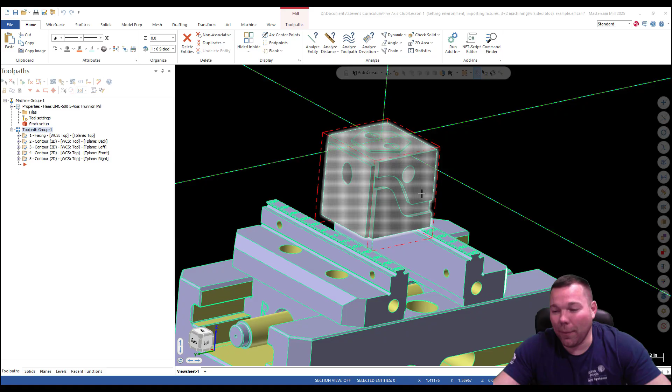Okay, well, we're going to dive right into it. So what we're going to get into here is we're actually going to do some of the machining to this. So we're going to machine around this hex. We're going to machine this profile. We're going to machine this circle. We're going to machine this cross. And we're going to machine this slot. And then we're going to do the drilling. Okay, so we'll do two types of drilling. But anyway, let's get into this.

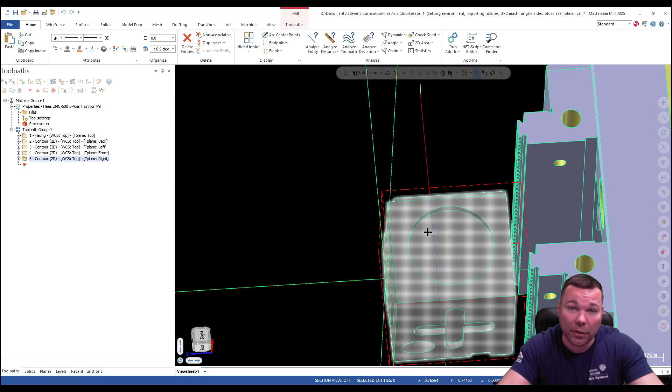So let's start with the top. Actually, check that. Let's start with the last surface we were on. So if we turn this toolpath on, that tells me right now that we were finished on the right side. So since we're oriented that way, we probably want to start there. That would make sense. There's no reason to flip the trunnion back up and start on the top. There's no advantage to that. Now, if there was an advantage to it, then I would do it. But let's go ahead and move forward with that.

So I'm going to turn that toolpath off. And I'm going to make sure I am on the right side plane. I am. So you get my toolpaths. And to do this one, I'm actually just going to do a dynamic mill. So one of the things I want you to recognize in here is the toolpath selection that I'm using. Not only should you be learning about how to do this with the 5-axis machine, but also you should be learning about these toolpaths as well. We'll be doing a lot of cool things with these toolpaths throughout these lessons. This is very basic for right now, but they will get deeper in and more advanced.

So machining regions, we're going to pick that guy. Check. From outside, no, we want to stay inside of that machining region. We don't need anything in here. So go ahead and hit check. Tool. All right, so I'm going to be using a 1/4 inch end mill for most of this. So even though I could probably rough this out with a bigger end mill, I'm just going to use a 1/4 inch so I don't have to do a bunch of tool changes. So I'm just going to go in there and grab my 1/4 inch end mill.

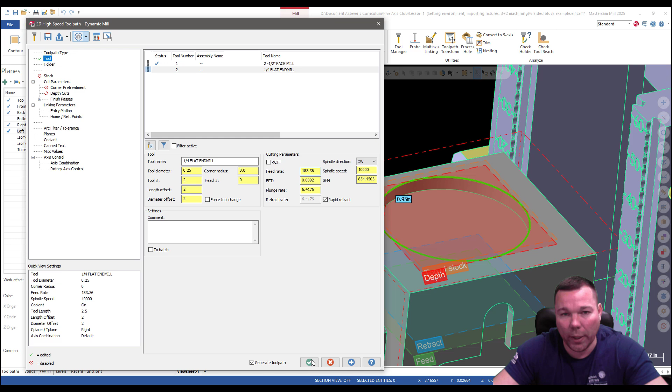And in order to confirm, machine definition parameters, some of its tools have said change values, yada, yada, yada. Okay, so that's fine. It's just telling me here that this particular machine is not set up for 12,000. Its max spindle speed is 10,000. That's all it was letting me know there. I'm actually going to show you how to change that really quick. So I'm going to save this, and I'm going to go into machine, and I'm going to go into machine definition. Check.

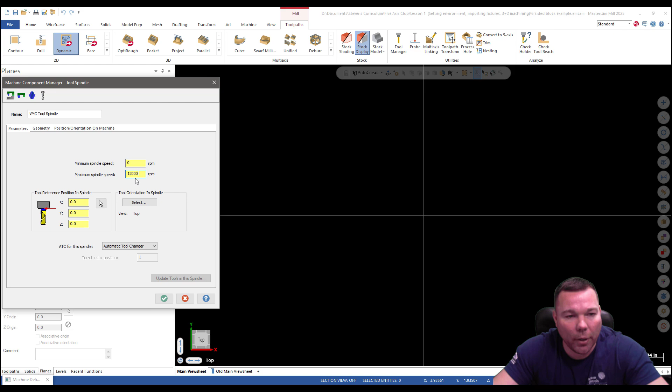And I know the machine that I'm going to be using has a max spindle speed of 12,000. So what I'm going to do is go into the mill spindle group. I'm going to keep opening this up until I get to the VMC spindle, and I'm going to hit properties. And right here I have a max speed of 12,000. That's interesting. So this is actually set to 12,000. So I'm going to hit check. Okay. Next thing I'm going to go is the general machine parameters, and we're going to see what we got in here. See if I have anything in here that might be changing that. No, that's interesting. But generally speaking, this right here is where you change it.

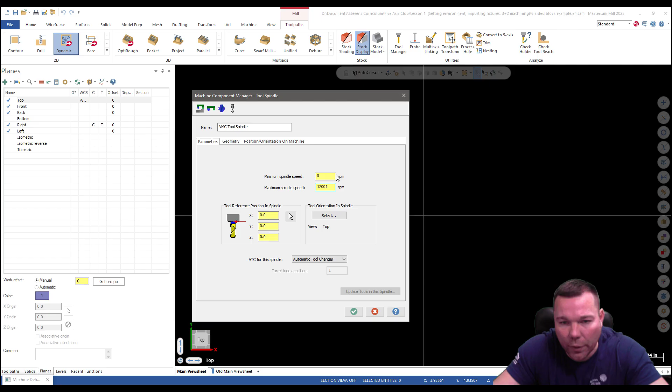Minimum speed 0, 12,000. I'm going to make this 12,001 just to see what happens. And I'm going to go ahead and hit check, save that, and I'm going to exit out of there. Okay, and then I'm going to look at my toolpath, go back in here. I'm going to see if I can save the changes to 12,000 now. All right, now it takes it. Awesome. Okay, so my feed rate 0.001. Okay, radial chip thinning.

Basically, what this does is it takes your surface footage, and I don't want this at 12,000 either because this is steel, I believe. I think I said we were making this out of steel, so I'm kind of messing up here. So I'm going to set this to 400. And I'm going to set this to 1,000th chip per tooth, and I'm going to turn radial chip thinning on. Notice how the feed rate went up. Basically what this does is it takes your step over, which is set at 10% of the tool diameter. I'm going to change that to 20. And watch what happens.

So this here's goofy too. So I have to change this to 650. I'll go in and change that then. But notice now it went down. So it's calculating it based off your step over, your feed per tooth, and your surface footage per minute. I always use this anytime I use dynamic milling. Let me hit check. Oh my goodness, this thing's gonna drive me nuts.

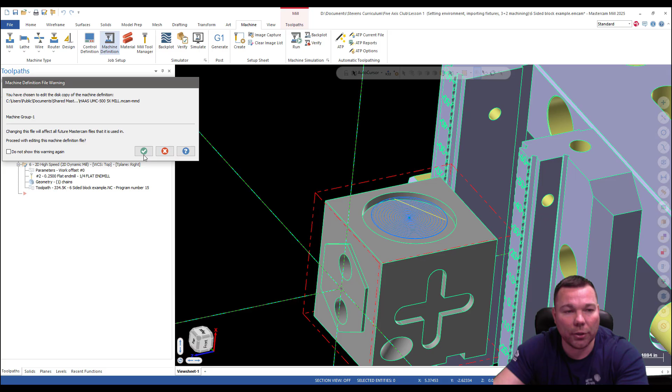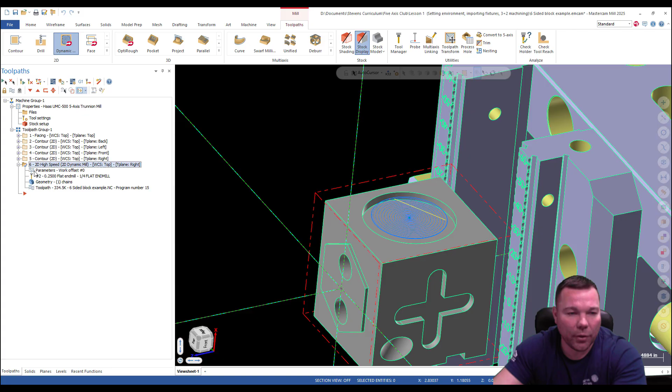And let's go to the machine, and I'm gonna go back into that machine definition. Check. I was just in here. I wish I had changed it. So I know that my axis feed limits are 833. And rotary axis is fine. Check. And I'm going to save that. Check. Yes. So it's just asking if I wanted to replace it with the updated values. Now I'm okay here. Now it's not going to freak out on me. I'm not going to leave any stock on the walls.

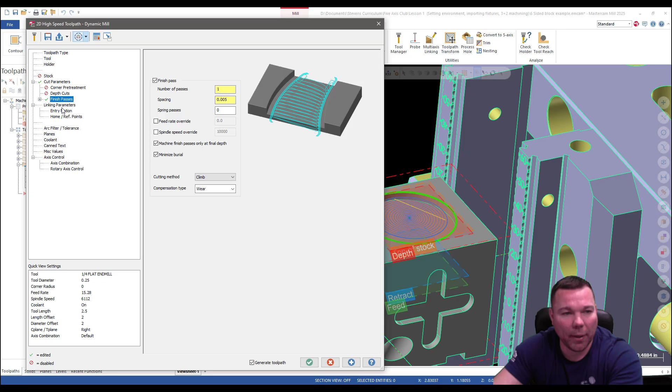Oh, really? Now it's doing it again? Not going to leave any stock on the walls. Finish pass, I'm going to take 1. No spindle override. Machine finish pass at final depth. Minimize burial, that's good. No spring passes, I don't really care about that. Depth, I'm going to select that. Looks good. Entry motion, we are going to helix in here. And everything there looks good. Check.

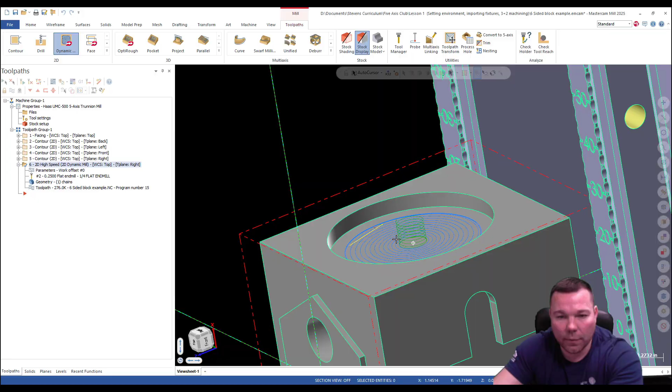Okay. There we go. Now I'm not wild about that retract right there, so we're going to take a look at that. Top of stock's right there. Feed plane. Well, that would be why. So we want 1.1, 1.25. Check. There we go. That's a little better, a little safer. Okay. That looks pretty good.

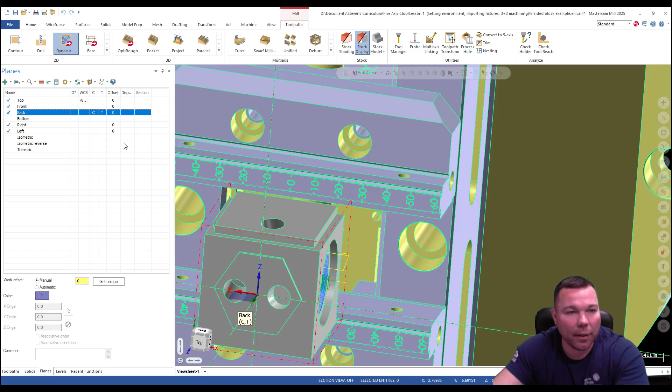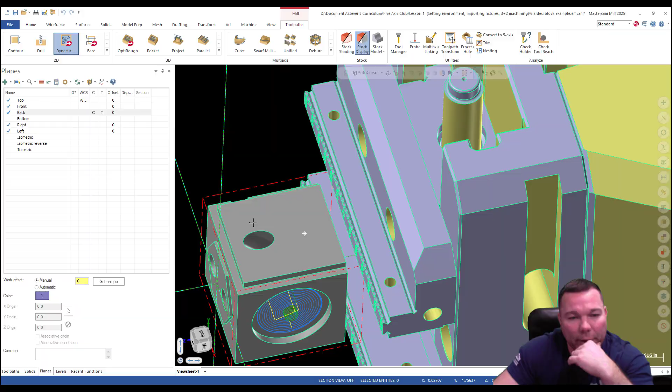Okay. So next thing I'm going to do, I'll go to the side, which is my back side. So go to planes, and we'll swap this to our C and T plane on the back. And for this, I'm actually going to do a contour, basically because I have a vise here. We could technically do this with a dynamic. I think I'm going to show you how to do it dynamic, actually. Contour would be really easy, and then we could just do multipass. But I'm going to show you how to do it with a dynamic.

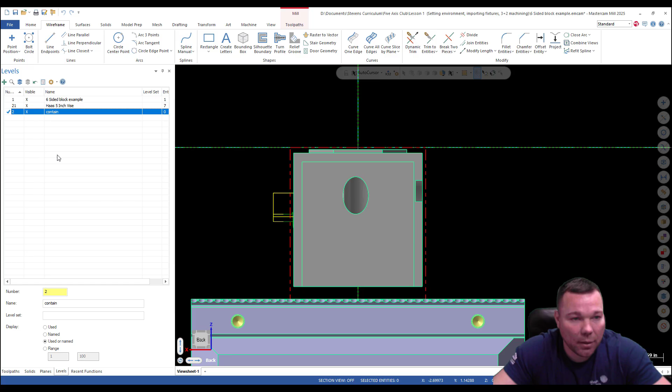So the first thing I'm going to do is I'm going to go to levels, and I'm going to create a containment. And I'm just going to create a rectangle. And I'm going to make sure that it's big enough, but it's not quite touching that vise. Okay, I'm going to hit check. And I'm going to leave that on for now.

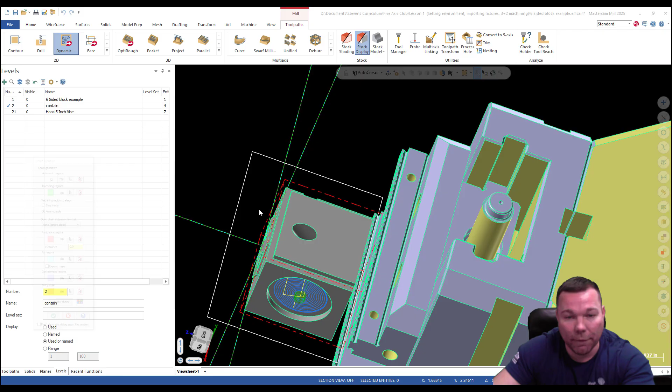And we're going to go into our tool paths, and we're going to pick dynamic mill. My machining region, not going to pick that. I want the stock. I'm going to come from outside on this one because it's an external feature. My avoidance region is going to be that right there. And I'm going to hit check. And then my containment region is going to be this. And I'm also going to have some, well, I can't have air regions because I don't have the edges.

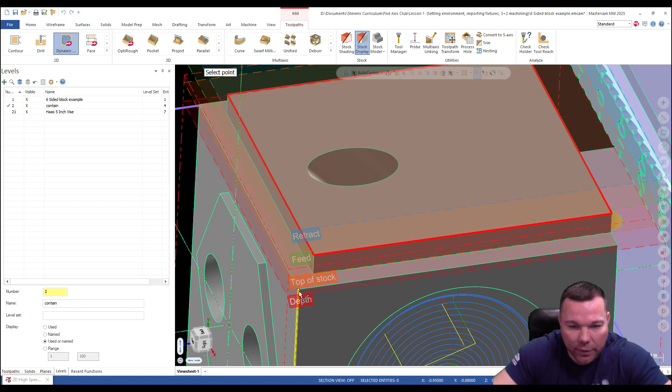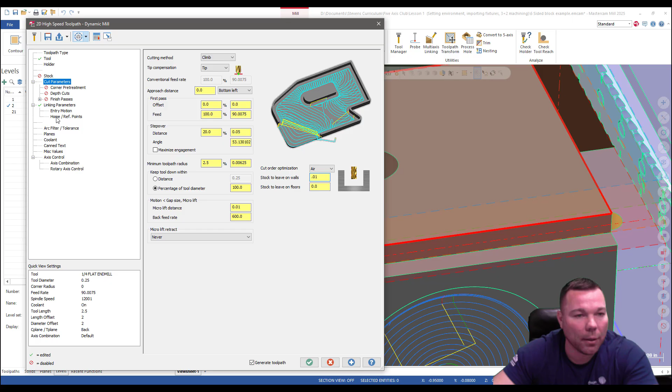So I'm going to hit tool, 1/4 inch. Sure. Everything looks good there. Depth. Make sure I got the depth selected correctly. That all looks good. Finish passes. I may have to turn that off. It doesn't like partial finish passes. So what I will do is I'll actually leave 0.005 on the walls, or maybe 0.01. And okay, I'm gonna hit check, see what it does.

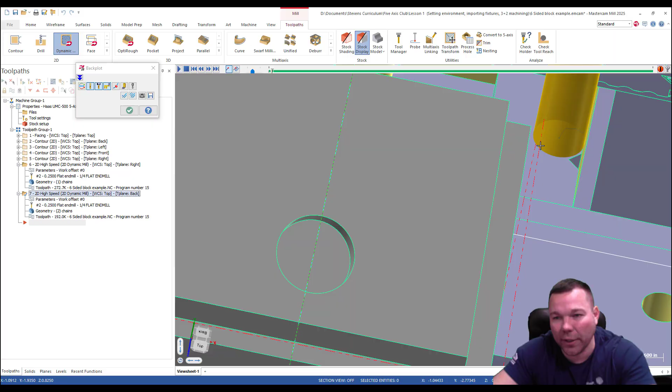All right, check that out. So now, when it comes in, we're not hitting. Just barely not hitting. It's engaging in the material, because remember, there's material outside. You can see right there, it's engaging the material. And it's going to dynamically mill that away, which is an awesome path. So that's really how we're using our containment region. We're just saying, hey, I don't want the tool to go past that backside. I don't really care about this, so I just made it extra big.

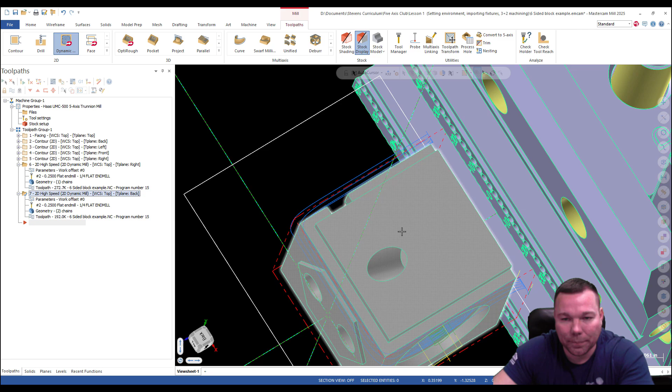Next thing I'm going to do is I'm going to take a finish pass on this. So I'm just going to add a finish. And I'm just going to grab that to there. And check. Tool, 1/4 inch again. And as you probably noticed, I don't understand why this keeps defaulting to that. One of the other things, always change your plunge feed rate because it's going to drive you crazy. If I'm not coming in on the material, I make it really high.

2D, wear off to the left, stock to leave on wall 0. Okay, entry and exit. I do want an entry and exit, and I am going to adjust this contour.

I'm going to make it maybe 0.01 longer, so I'm just going to type in a value rather than a percentage. And then I'm going to add my entry and exit here, and leave it just the way you see it there, 10%, 10%. We'll see how that looks, and then I can adjust it accordingly if I need to.

Linking parameters, depth is going to be right there. Top of stock will be right here.

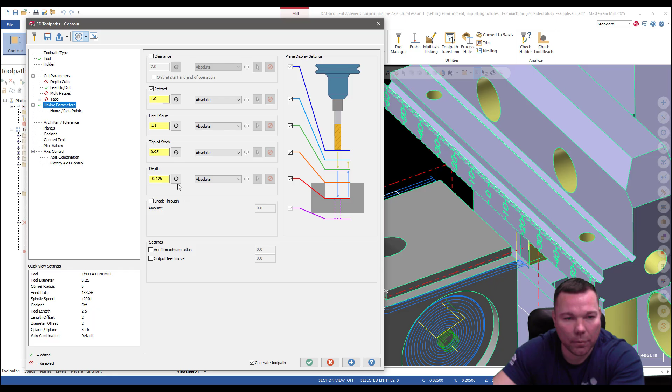And feed plane will be 1.1, 1. Oh, these are all incremental. I'm messing up big time. Absolute, absolute. Okay. I could have left them all in incremental, but oh, that one I'm actually typing in. -0.125. Okay.

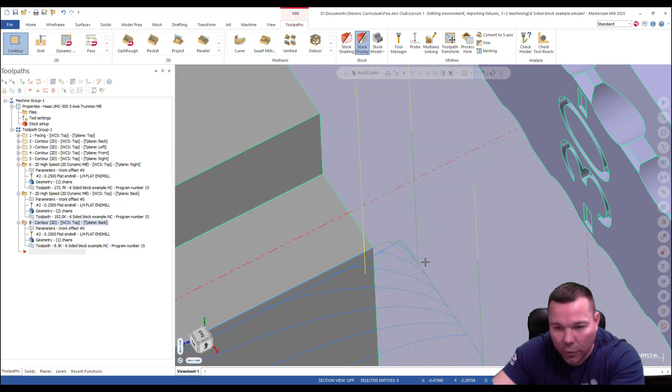And we are good, I'm going to hit check. So my finish toolpath starts right there. And since I know that's not back further, I know I'm good. I know the tool's not going to collide because I already checked it with the dynamic, and it's actually in front of the dynamic. So that's finished.

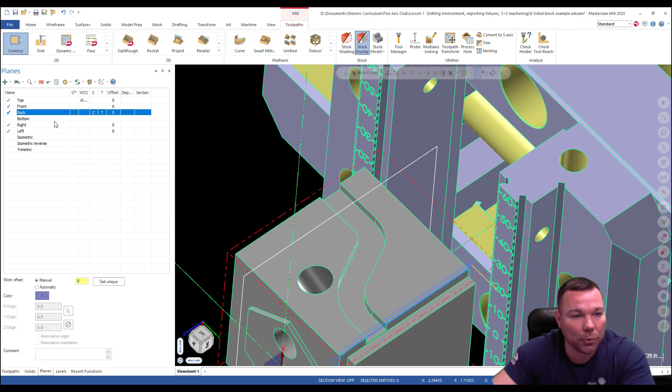Okay, next, I have this slot through here. This is going to be on the left side of the part, so I'm going to make sure that my planes, my C&T plane, are on the left.

For this slot, I'm actually going to do a peel mill, so I'm going to click this off. I'm going to grab that to that. Ooh, yikes, didn't like that. Undo.

So we'll step this. Okay, hit check. All right, so I have my machining region, 1/4 inch end mill. Still don't know why this thing is defaulting to so fast. I must have picked it out of the aluminum or something. Let's make this 50.

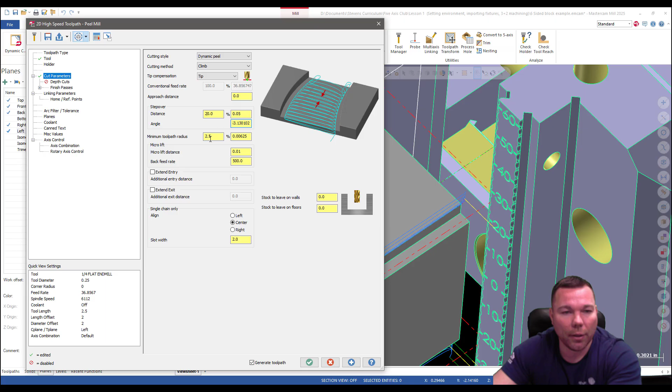Radial chip thinning's on. Step over, we're only going to step over about 20% of the cutter here. Everything here looks good. Finish pass, yeah, let's definitely finish that. We'll leave 0.005 on the walls to finish. Definitely climb and wear, that way I can adjust it on the fly.

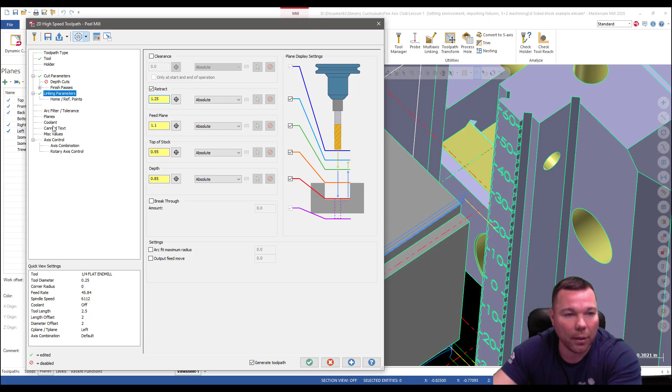Depth, it's going to be to there. Top of stock is 1.0, I guess. Let's check. Nope, 0.95. 1.1, 1.25. And we should be good. Check. And there we are. So it's actually going to do that slot, and it's going to finish it for us.

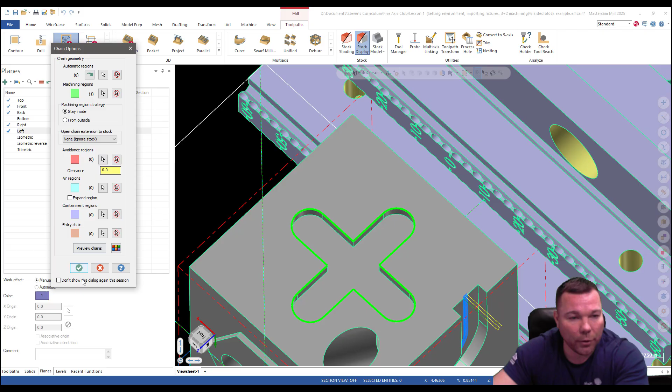All right, let's do this one. So this one, I'm going to dynamic mill. Come back, do a dynamic. I'm going to do my machining region, full check. Okay, stay inside of that. No avoidance region, I don't need anything there. It's just going to machine everything out of that.

1/4 inch end mill, once again it's insanely fast. I don't really need to change this because this is going to be helixing anyway. Oh, what I did not do, I broke my own rule. You got to make sure that you set a holder.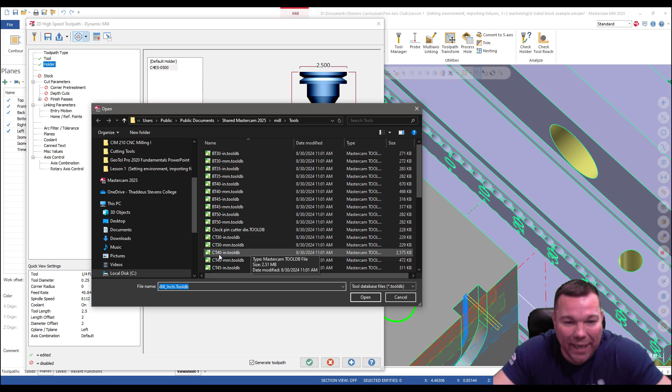So, yes, let's go in and open the library. Let's go to our Cat 40 inch. I actually thought about this on the first toolpath and I forgot to do it. Cat 40 inch, all these B's, that's for BT. That's a different tool holder, we don't want to use that.

We want to go down till we get to the C's. Cat C4 is Cat 40. So we got a Cat 40, and this is an ER20, ER25, ER32. So Cat 40, the C3 is the length, so it's just a designation for the length. So you can see C4 is longer, 2.8, C3, C3.

So let's do C3, 32, ER32, 2.575. So now let's do C4, ER32. You see now it's long, it's basically all but 4 inches. So it's like roughly a 4-inch gauge length.

Okay, so I'm actually going to use an ER16 because this is a 1/4 inch tool. So that's perfect, that's a Cat 40 ER16 holder, and I'm going to have this extend. I'm going to have the tool sticking out of there, probably about 0.875. Okay, so that looks pretty good.

The holder in this operation does not match other holders specified, so basically I want to update the assembly and use it for all of the tool paths using this tool. And that's what it defaults to, so I'm going to hit yes. That's what I want.

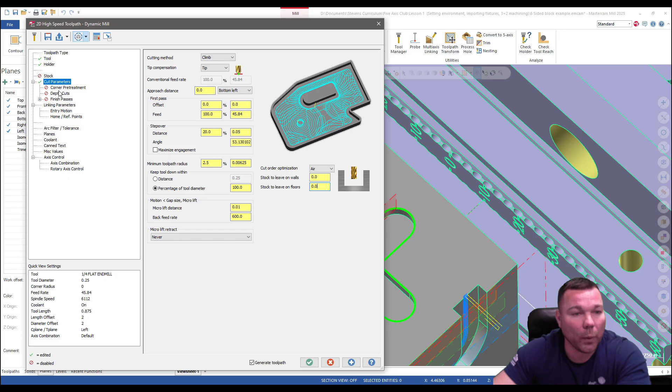Okay, we are going to leave no stock on the walls because this is a closed contour. So what we are going to do is put a finish pass on this, and I'll leave that on. That's all set. Good. Linking parameters.

Oh, I am on the wrong plane. As you can see, I never changed my planes, so it's telling me the wrong depth and all that good stuff. Now, not to worry, I don't need to panic. I can come in here and change to my front plane. And these two, and then of course this one always stays on top.

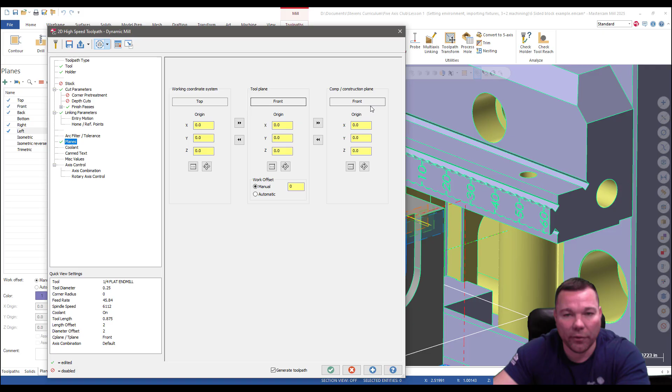Now I can come back and set my linking parameters properly. Top of stock, 1.1, 1.25, all that's good. Entry motion helix, all that is good. I'm going to hit check.

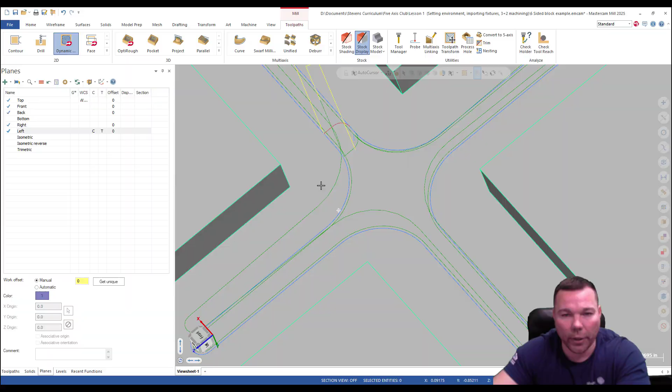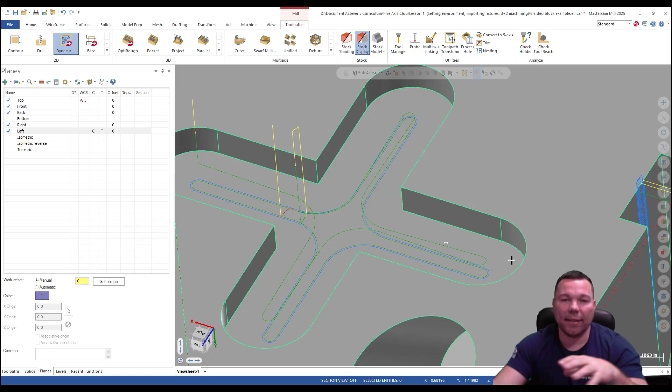Oh, yikes. Okay, so this raises an interesting situation here. Notice how it did a profile ramp. It's actually starting here and ramping down around that, as you can see. Now, it basically decided that it didn't have enough room for the helix entry, so it did a profile ramp, which is cool. That's intelligence in the toolpath. We don't want to plunge, that's for damn sure. So it automatically went to a profile ramp, which I'm okay with.

Yeah, in this case, I'm good to run with that. I was initially kind of worried because I didn't see that, but now that I see there's a profile ramp, that's perfectly fine. All right, so let's save this, and let's go ahead and play all of this.

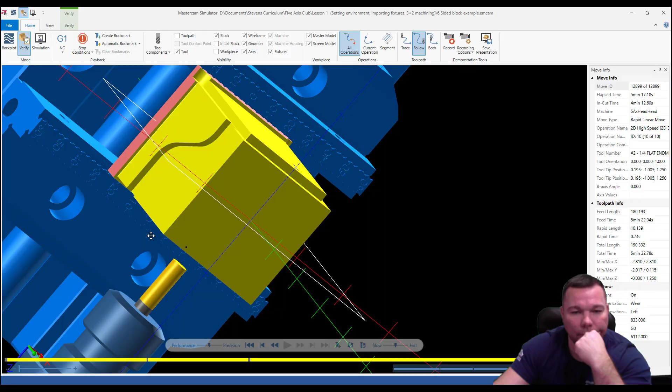So that looks pretty darn good. Now, I'm going to fast forward through all the facing operations, and now we're going to take a look at just this one. I'm going to slow this down.

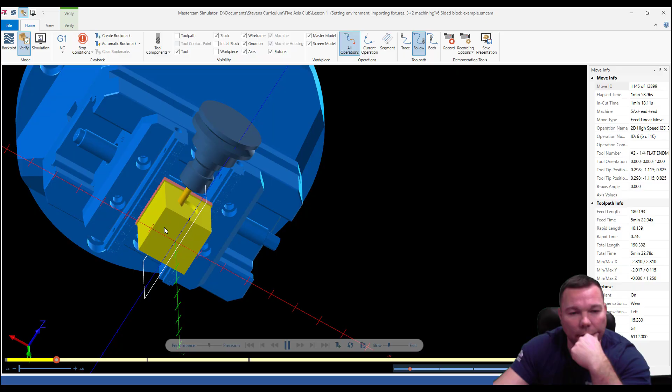So helix is down, working its way out. I always like to look at it from this view so I can make sure the tool's not going to hit the vise. And it's not, it's in the middle of that gap there. Also, just barely not hitting that vise. Goodness, look how close that is.

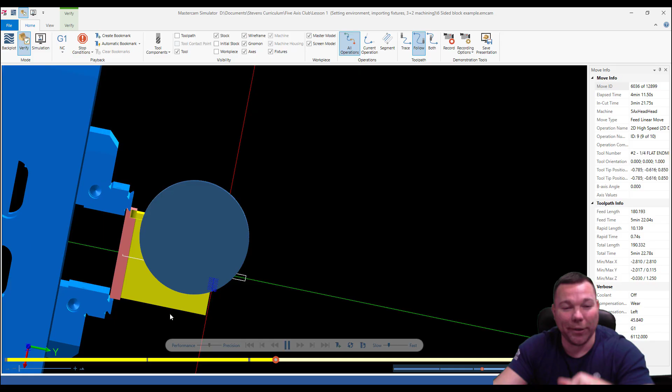Clearance is clearance. This is definitely not going to hit. I'm going to speed this up because this takes forever. It actually is pretty quick in the machine. This is one of those paths that takes forever to simulate, but actually really runs quick in the machine. Okay, all good, so everything there looks good. I'm happy with that.

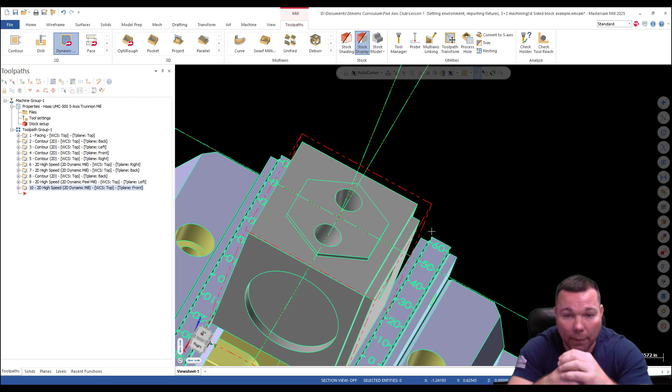Okay, so let's get out of there. I am going to turn off my containment because I don't need to look at that anymore. And I'm going to come back in and turn off all these tool paths. All right, so we have essentially a couple things left to do. Number one, we didn't deburr anything, so we probably want to chamfer or deburr some stuff. Number two, we need to drill those holes. So that's the next thing we're going to do.

All right, so we're going to go ahead and drill using 3+2 in this case. So I'm a little aggravated because I actually recorded the second half of this video and my mic was off the whole time, so now I'm redoing it again. But anyway, let's get started. I'll show you how to drill these holes using 3+2, actually one hole, and we're going to pick the most extreme example here.

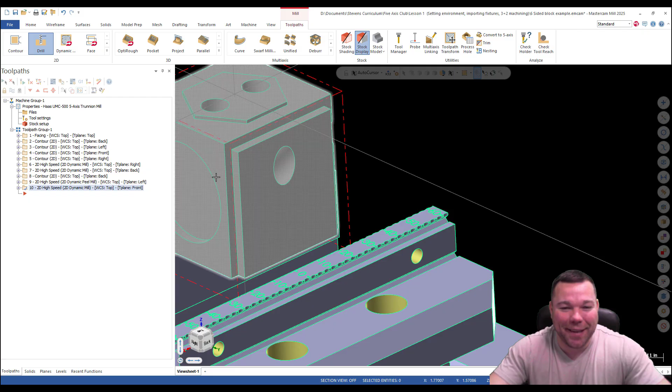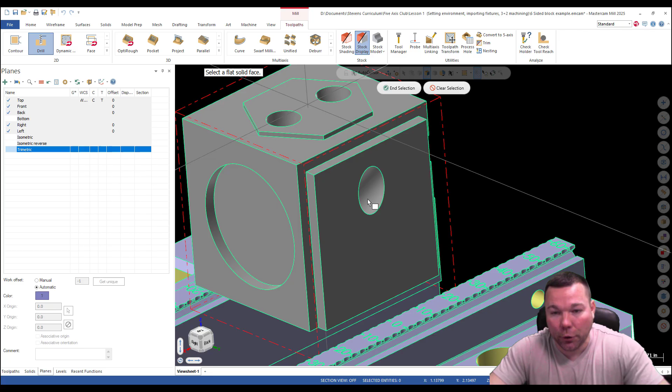So I'm going to pick this one. We're not just drilling that on a regular plane, we need a custom plane for this. And the problem is it's very difficult to create a plane for a hole that's in at some random angle like this. So if we go to planes, we can't do from geometry because there's no geometry. We can't do from solid face because it's a curved surface, so it doesn't like that. We can't do from G view because we would never get it oriented correctly.

G view means your graphics view. So if I created a plane right now, it's going to create it normal to the way I'm looking at it. We will use this later, so I will demonstrate that. From entity normal, I can't grab the bottom of the hole, so I can't do that one. Relative to WCS, can't use that one because it's not normal to any WCS planes. I could probably get dynamic to work, but it would be really painful. There's a lot easier way of doing this, and it gives us some geometry in the meantime.

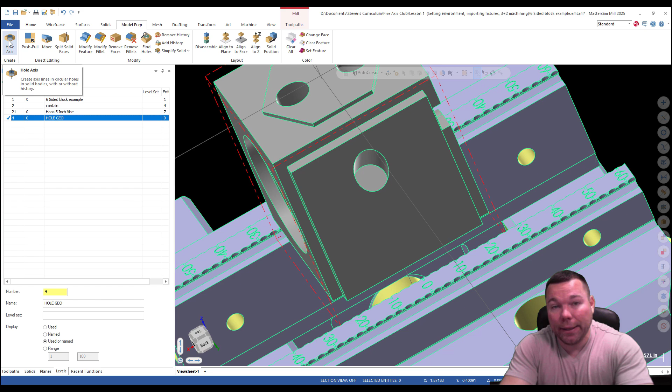So I'm going to go ahead to levels. I'm going to create a new level, I'm going to call this hole geo. Okay, and I'm going to go to my model prep, and I'm going to grab hole axis. Throughout these lessons, we're going to learn a lot of unique ways and interesting different ways to create geometry that's needed for 5-axis machining.

So this is going to be one of those ways I use all the time. I'm going to pick the hole axis, grab that hole, and it's automatically going to project geometry, a circle. It's going to give me an axis and a point. I don't really want the axis, so I'm going to turn that off. I don't know why it's even showing that, to be honest, because it is turned off—probably from the last time I did it when I wasn't recording, or when I had my microphone off.

So I'm going to go ahead and hit check. Oh, it showed it, but it didn't actually make it for us. Okay, cool, so there we go. Now we have a hole. We can drill that, but we need to create a plane on it first.

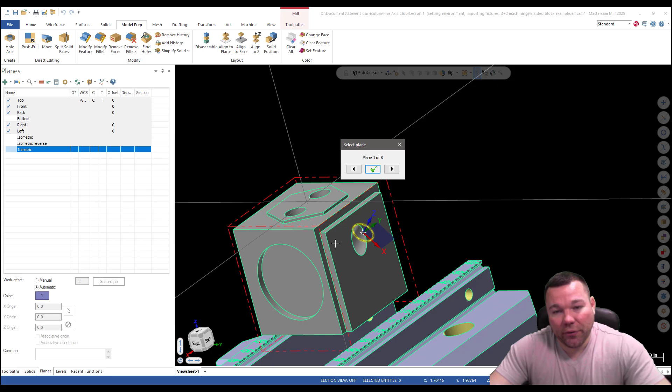So you may have guessed by the choices we looked at earlier—we're going to pick from geometry. I'm going to select that hole. Now, when I orient this, I'm going to go to top, and this is how I usually do it. This is looking down from my spindle, as if it was sitting in the UMC. I'm looking down from the spindle, my X positive to the right, my Y positive back.

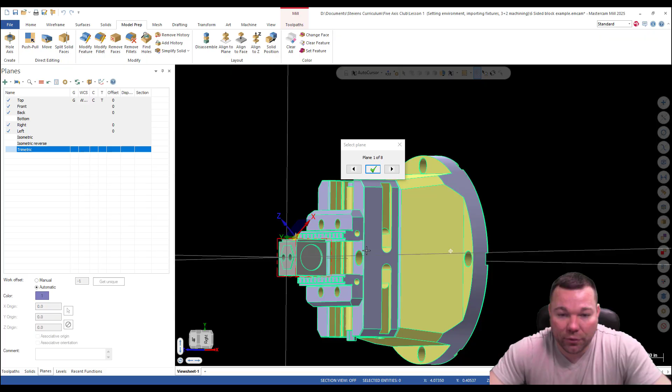So I know that my UMC tilts and rotates around the Y—that's how the B axis rotates. And I know my C axis rotates like this. So this would be the way it would look in the machine when it's machining it.

So that's the one I'm going to pick. Now, if it wasn't right here—and it's surprising it's the first one—what you can do is just toggle through these, and it'll give you different orientations for your gnomon. All right, let me get back to where I was there. Okay, so that one's perfect.

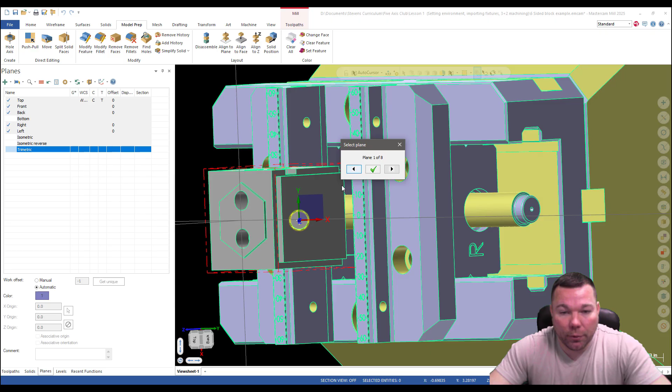So I'm going to hit check. I'm going to call this hole plane. Check. Okay, that looks pretty good. So we're going to work on that.

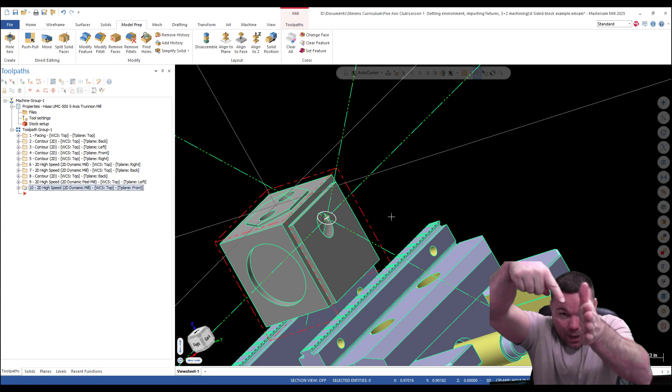Now, this hole is drilled in at an angle, a pretty steep angle actually. We're not going to be able to just take a pointed drill and drill down in there. We need to give ourselves a flat, so we probably need to helix bore this or circle mill it first, to give our drill something to hit normal to, rather than trying to come down on an angle. That drill is just going to deflect.

There are flat bottom drills that can handle stuff like this, but we're going to act as if we don't have any of those, because normally we don't have any in our shop. I was doing hundreds of these parts, and I could find a drill that was flat bottom that would actually work to drill. I would try one—I would use that because it would save an operation. But for now, we're going to do it the long and tedious way, we'll say.

So I'm going to use a helix bore for this. I'm going to come in, grab that circle, hit check. Okay, I'm going to grab my 1/4 inch end mill. I'm not going to worry about speeds and feeds for this because you should know how to set those properly—we already have that set up.

0 stock on the walls, 0 on the floors. We're going to put this in wear so that way we can comp it at the machine in case it comes in a little small. We don't want our drill rubbing on the outsides of anything—we probably want it maybe just a hair big, but within tolerance.

Roughing—I'm going to rough this. My pitch, that's the pitch that it helixes down. Remember, I'm using a 1/4 inch end mill to rough out a 3/8 hole, so that thing's basically going to be almost plunging down at that pitch. I need to reduce that because it's not going to be making a very big circle, but it's going to be going down very fast in that small circle. So I'm going to reduce that pretty significantly.

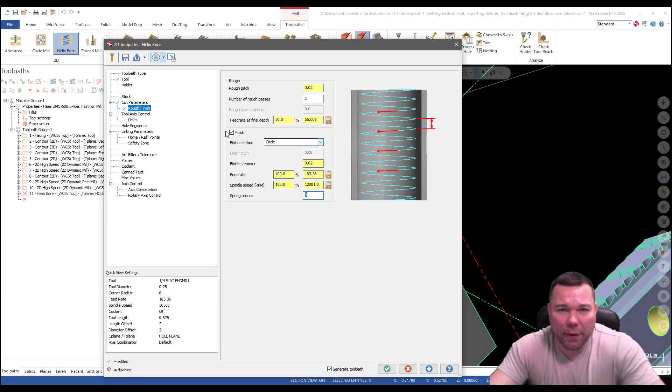I'm going to do finish. Normally I'll do a helix downward, but I'm just going to do a circle for this because there's probably not a lot on this. These feed rate overrides aren't necessary either—they should just be 100%, 100%. We shouldn't be making those any bigger. I'm not going to do a spring pass here—I could if I was really worried about the size or deflection of the tool.

This stays in 3 axis because that's what we're doing. Remember, we've already created the plane, so our plane is going to control our tool axis now, or our tool vector. Okay, now we're going to set our depth. Okay, so this is where we're going to run into trouble. This solid is really a pain in the butt to select a depth.

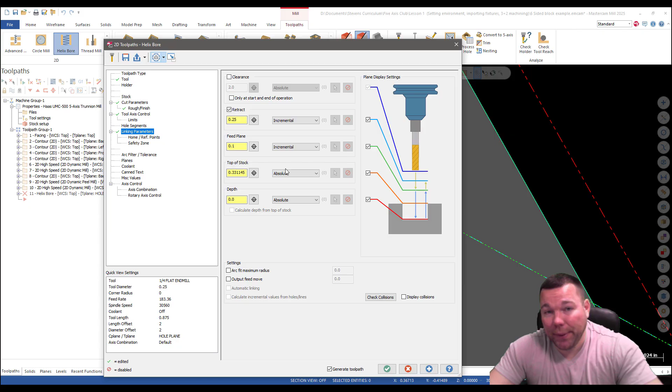It's automatically defaulting to the 0. So we need a piece of geometry down there. So we're going to hit check. And it's going to put it up there because I really selected depth. And we need to create a piece of geometry at the very bottom of that hole to select our depth.

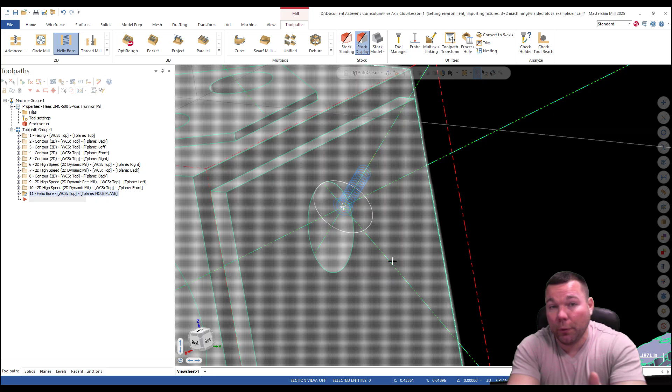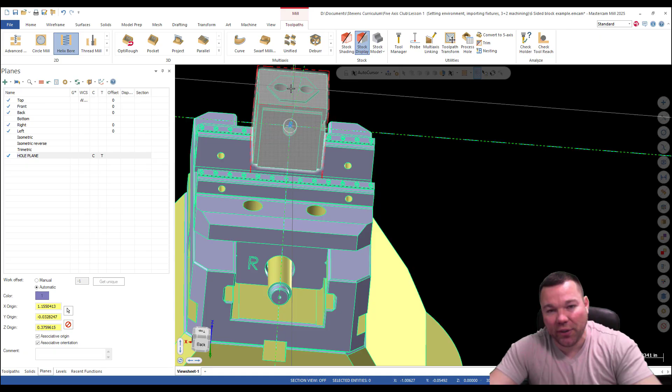Now, there are a lot of ways we can create this geometry. I'm going to show you one. This is one of the unique ways you can create geometry, and I use this command quite a bit whenever I'm doing 5-axis programming. What I'm going to do is create a plane that intersects perfectly the middle of this hole. If I go to my right side, my right plane is going to kind of intersect it. If this hole's in the center of the part, it would intersect it perfectly.

So I'm going to go to relative to WCS. I'm going to pick my right plane. It's essentially going to make a copy of the right side plane. I'm going to call this hole geo plane because that's all I'm using it for. I'm going to right click on it, edit, grab the Z arrow and drag it to the center. And you can see that hole is not in the center. It looked like it was, but it's not. You can never just assume things. You have to check. So now I have a plane that's exactly slicing down the center of that part.

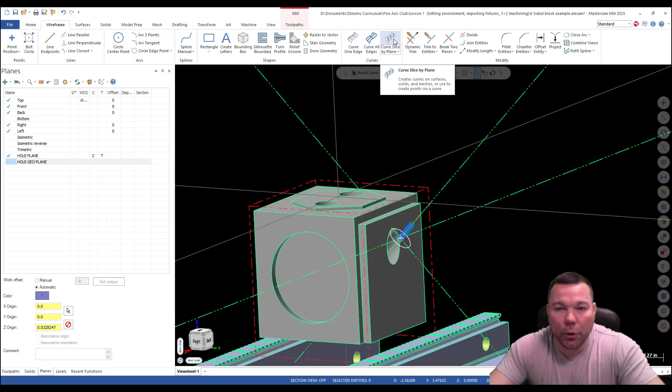So I'm going to go back to my wireframe and do curve slice by plane. And I'm going to try to just select the surface here. There we go. If I selected the whole part, it's not the end of the world, but it would just make the line all around the part. I really only want it on this surface. So I just got that face.

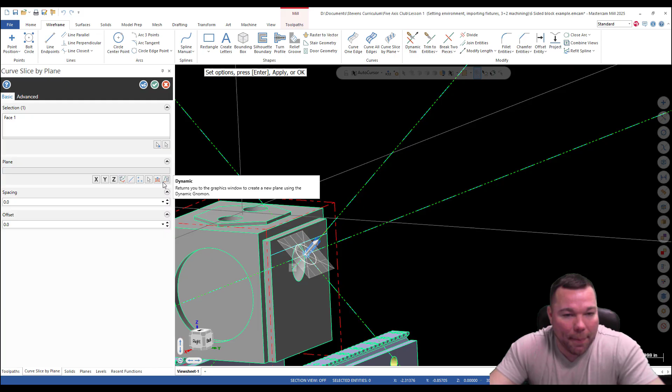And now I'm going to go in. We have a bunch of options here. We can do dynamic plane. I could have just done that. But I can also do named planes. And I'm going to grab that hole plane, hit check. And it's going to create a piece of geometry straight down the middle of that part. One of the things, I don't know if... oh yeah, I did. There it is, hole geo. So all of our stuff's on hole geo right now, and that's where we want it.

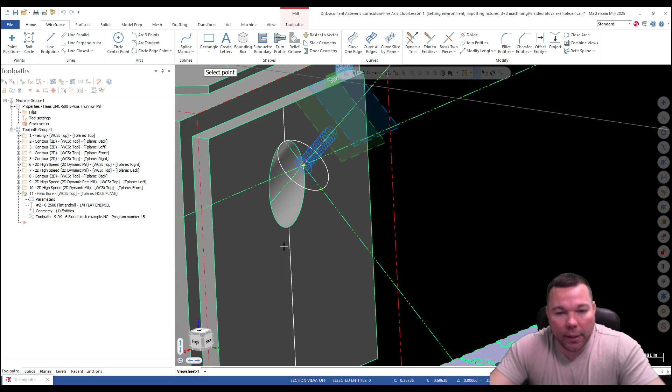Okay. Now that I have that line endpoint, I can select that and get my depth correct. So I'm going to select that. It still is going to give me a hard time. Well, I can get around that. Just go to my levels, turn off that solid. There we go. -0.375, which is ironically a round number. It's pretty cool that it worked out that way. Top of stock, that's just going to be the center of the hole. So that's 0.

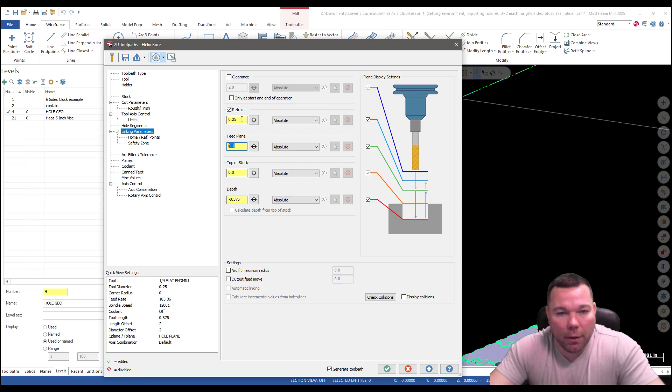Absolute, and we'll make this absolute. So feed plane will be 100 thou above, and the retract plane will be a 1/4 inch above. And let me make sure we're in the right plane here. Hole plane, we are good. We need to change our offset to 0 to override it. I'm going to hit check. Check. And there we go. So let me turn the hole geo... actually, we'll leave that on. We still got to drill it.

Let's go ahead and turn our solid back on. Let's go to our tool paths and select all. And let's simulate that and make sure that's in the right place now. I'll turn this up because we don't really want to see it actually doing it.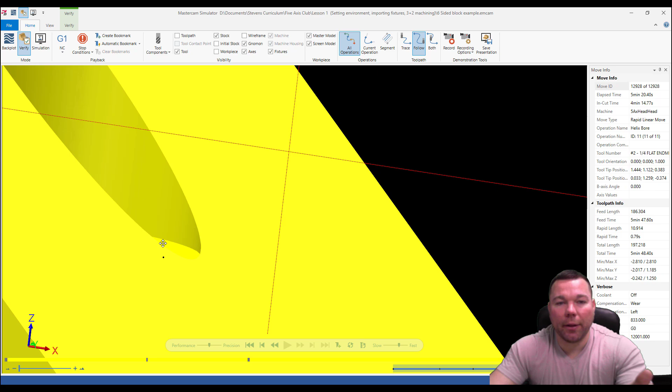Oh, it's perfect. It's exactly what we want. Okay. Now, there's one thing I want to address on this at the moment. If I zoom in here, you can see that my lead-in is an arc. Remember, I used wear. So I cannot activate cutter comp on an arc. As soon as I put any amount of wear in my control, it's going to alarm out and say G41, G42, cutter comp activated on G2 or G3. So I need to fix that.

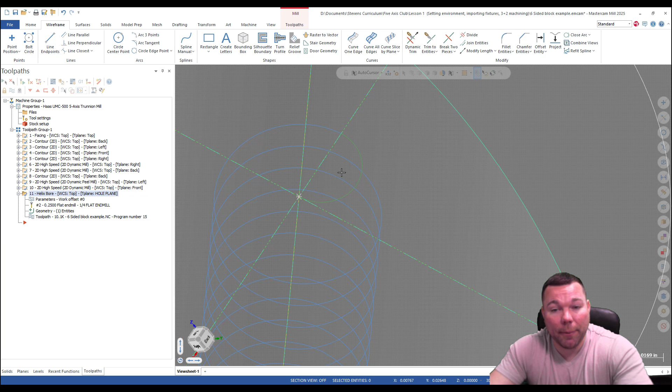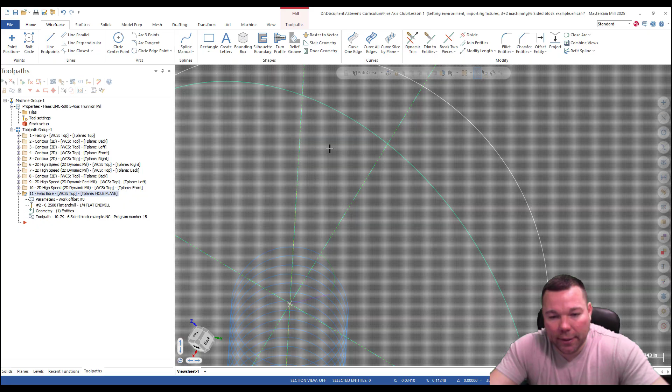And this is where I said I was going to come back to here. We need to enter at center, sorry, start and end at center. And the entry-exit sweep needs to be changed to 90. And now I'm going to hit check. Now I have that nice straight lead in. And you can see at the bottom I have nice straight lines for lead ins and lead outs. Okay, so that will be fine now.

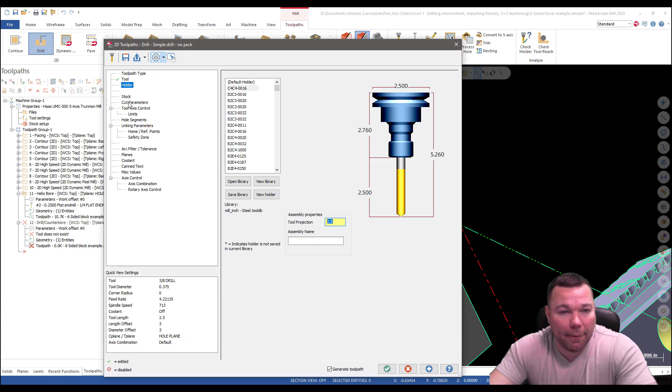All right, next we're ready to drill. So I'm going to go ahead and grab my drill, select that circle. I'm going to go ahead and hit check. Grab my tool, 3/8 drill. Keep in mind, I've already set this up. I set the holder up. I put it in ER16, Cat 40 ER16 with a 2.5 stick out. And we're going to stay in 3-axis because remember, we created a plane to control our tool.

Depth. Just going to select the bottom of that hole. And we'll come back to tip comp here in a second. Top of stock. Essentially going to be 0. Now, is it going to be 0? That is the question. It's not, because technically we've already milled all of this away. So technically we could select down here if we wanted to. If I feel confident that that hole is just slightly bigger than the drill, and I want to rapid it down to there, I can.

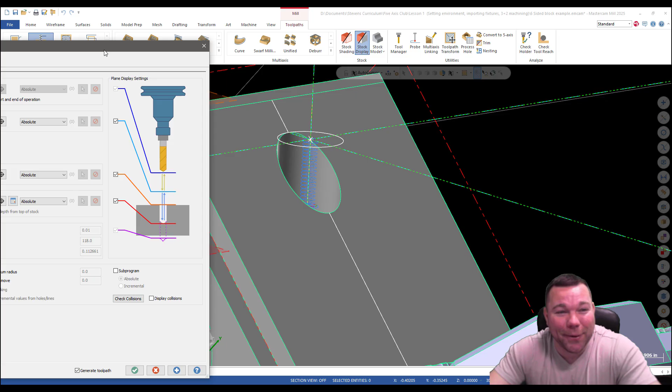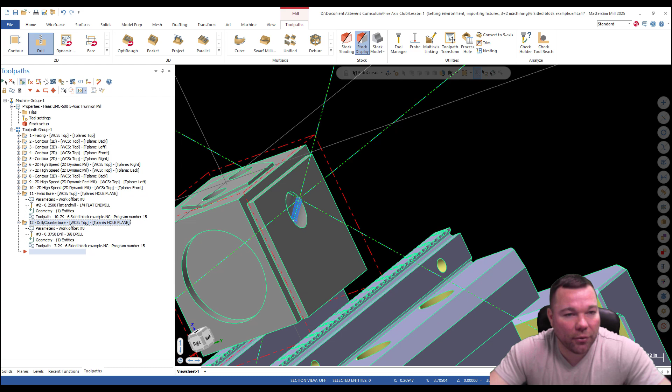I'm probably not going to do that. I'm just going to go at 0, and I'll let it feed down through, and I'll be happy. If I was making thousands of these, I may change that. We'll make this 0.25. Okay, and we're in hole plane. Still everything 0. Check. Okay. So I'm going to turn off my hole geo. Come back on this level. Go back to my toolpaths. Select, and let's run it.

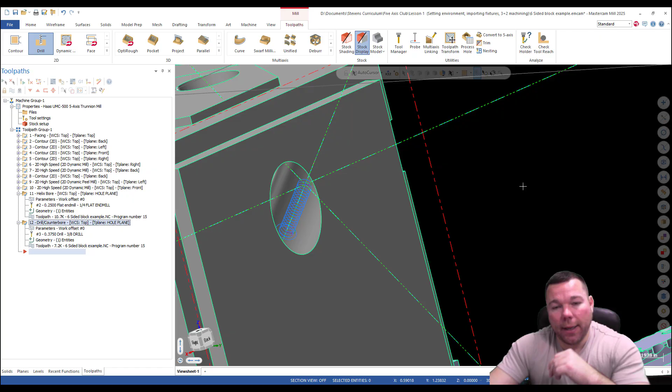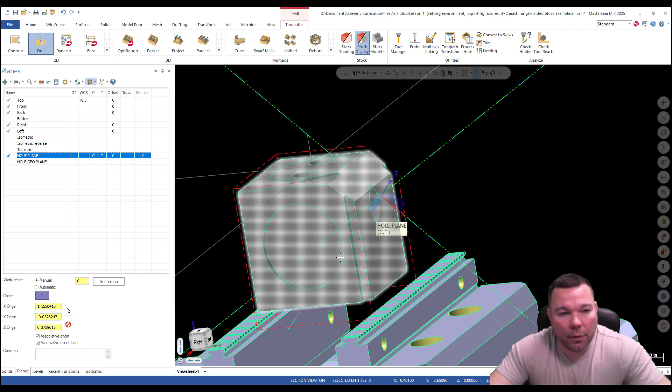Okay, that looks good. Our hole's drilled down in there. Now, are we sure that the depth is correct? No, we're not. Can we be sure that the depth is correct? Yes, we can. Here's another little trick. If you don't know this already, what you can do is go into your planes, and we have this hole plane. I'm going to hit section view. Nope, wrong plane. Hole geo plane. There we are. Now it sections that part.

So what I can do is I'll go back to my toolpaths, turn off my helix bore, leave this on, and we're just going to simulate this, and I'm going to go top. Oops, check that. Go back to my planes. Normal to that. There we go. So I put my G view, my graphics view on here. I'm going to hit check, step forward. Okay. Only the tip's going down to the bottom. Okay, so we need to fix that.

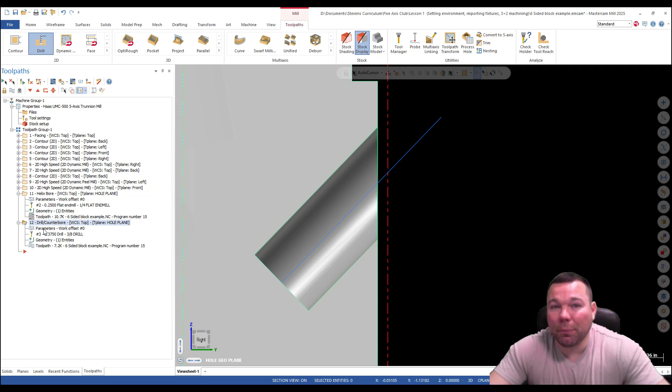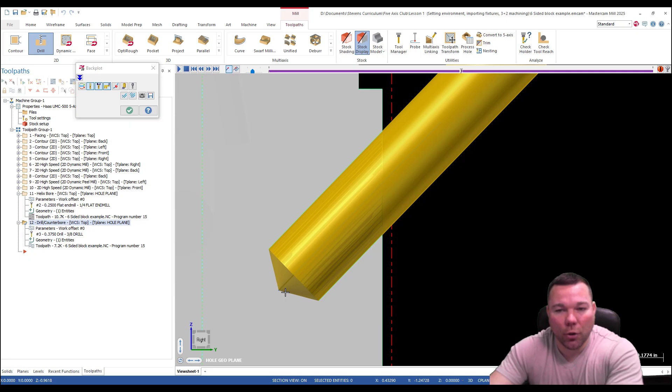Because even though I extruded this as a square bottom, technically I want that whole diameter all the way down to the bottom. So I will have a drill point in here, which is fine in this case, since I made this part. So go to linking. I'm going to turn on my tip comp. I don't want to go 10 extra. I want to stop right at that. And I'm going to go ahead and hit check. And now I can simulate, and boom. Right there, it's exactly on that point. Check. And I'm good to go.

Okay, so turn that off. Go into my planes. I'm going to toggle off my section view. And I go back top. All right, so that's going to be all for this video.

The next video, I'm going to show you a much easier way of drilling 5-axis. We're actually going to do 5-axis drill, which will allow us to grab the rest of the holes, do them all in one tool path, all different depths, everything. Super easy. Now, that does, well, I'll get to that when we get to it. We'll also go into how to do the second side. So we'll set up our fixture for the bottom, and we'll finish up this part.